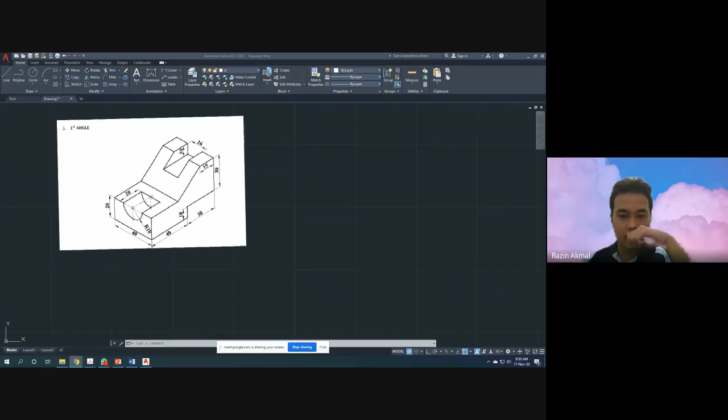Change the unit. Set the quadrant, correct? So first of all, we set the quadrant. You can set the quadrant by just adding a line anywhere, it's okay. Anywhere is fine as long as you have a quadrant or 4 quadrants.

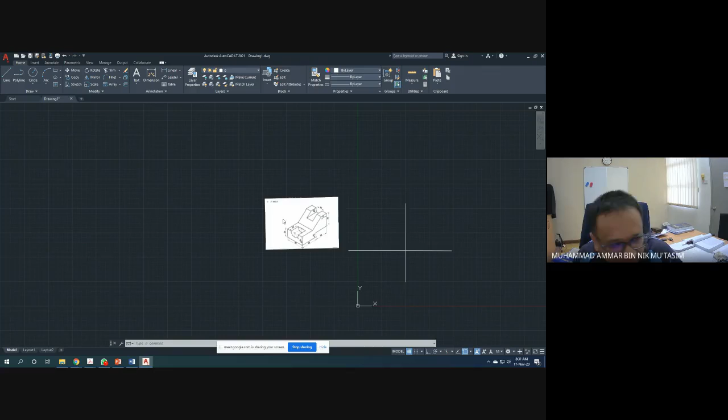Okay, and then what's next? Drawing a 45-degree angle on the third quadrant. All right, so this is the first angle. So we have to draw a 45-degree on the third quadrant, that's the main point. Okay, you guys can also do this, and this is also an assignment, so you should be submitting this as well.

First of all, specify the first point of the line. Okay, and then what's the 45-degree of it? What is a 45-degree on the bottom left? It's so if you cannot remember, you click on the units first, to make sure you change first. Okay, I didn't change because I was going to just show you without the units. But if you remember, east is 0, north is 90, west is 180, south is 270.

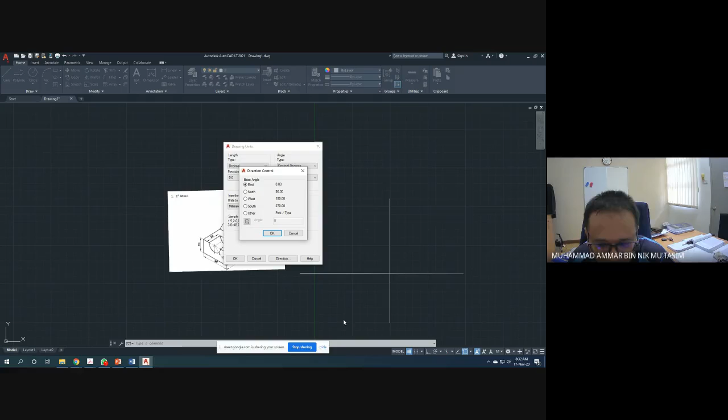So what's 45-degree on the third quadrant? It's 45 divided by 2, what is 22.5? So 180 plus 22.5 is 202.5. Okay? Correct or not? Okay, 202.5. So specify the line, set the direction, set the angle to 202.5. Tap enter. Is this correct?

You sure this is 45 degree? Doesn't look like 45 degree. So what is it? Calculate for me: 270, 225. Okay, good, it's 225. So third quadrant, angle 225. Alright, this is 45 degree. Okay good, so what's next?

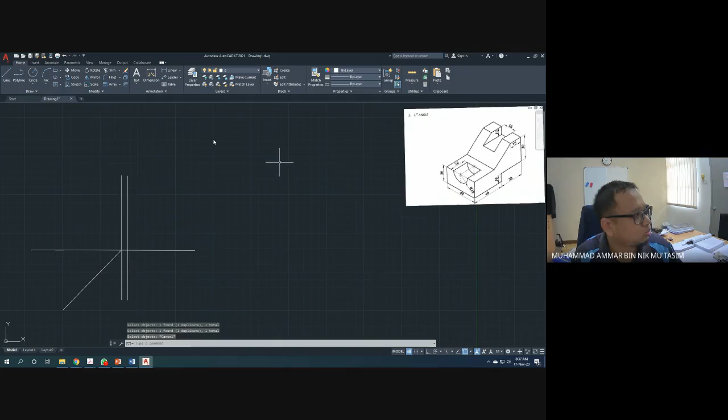You don't mind me, I'm just moving around because it's taking a lot of space. All right, okay.

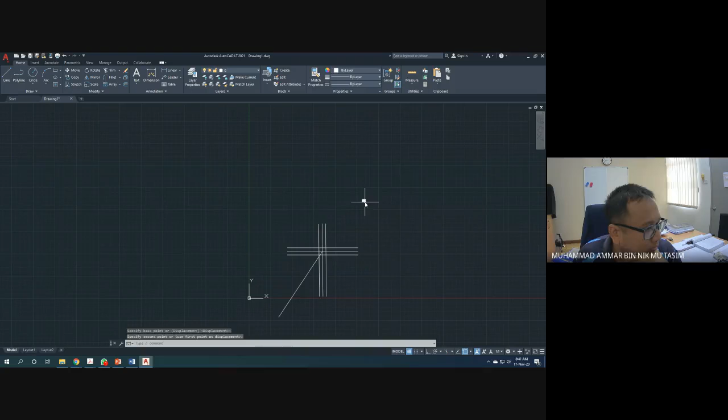Okay, has everyone managed to do it? So small. Okay, everybody done with the offset on the lines?

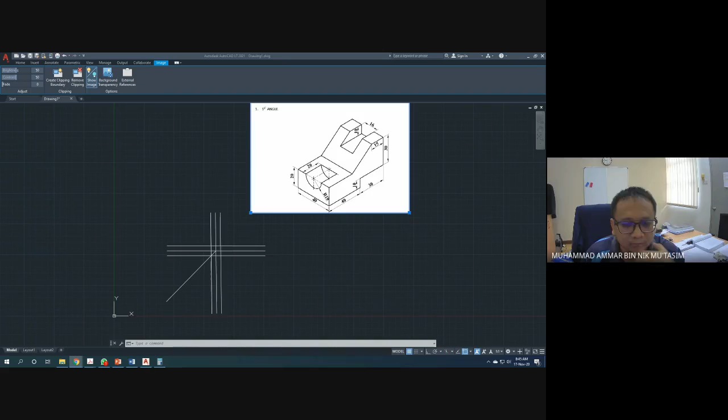Okay, all right. Is everybody okay? Right, so let's start with the drawing. Okay, let's start with the drawing.

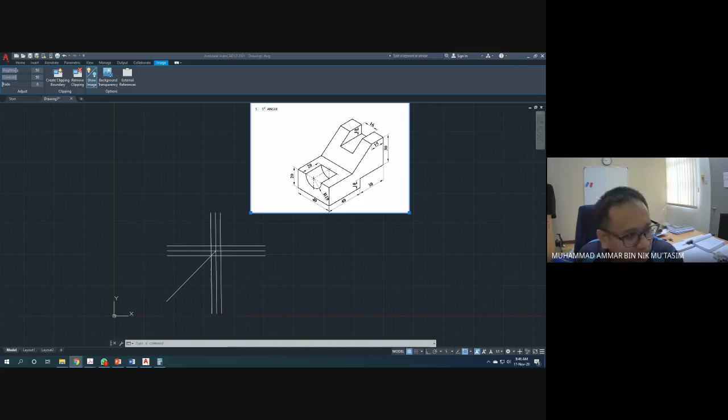So we are doing a first angle orthographic view, and then we want to know which direction the front view is going to be. So you can choose any direction you want, you can either choose this direction, or you can also use this direction. So the best way to choose a front view is to have the biggest surface area for the front view. So which one has the biggest surface area, this one or this one, for a front view? So this one, it has the biggest surface area.

So we choose this one as the front view, this one as the side view, and the top view would be this one. So to draw the front view, okay, you have 40 plus 30, 70. 70 plus 10, 10 plus 30 is 40. So it's 70, 40, that's the first one.

You should take the line, draw this one, 70, okay, with an angle of 0, of course. Okay, 70. Next, another 40, okay, with an angle of 90, of course, an angle of 90. So you have a 40 size.

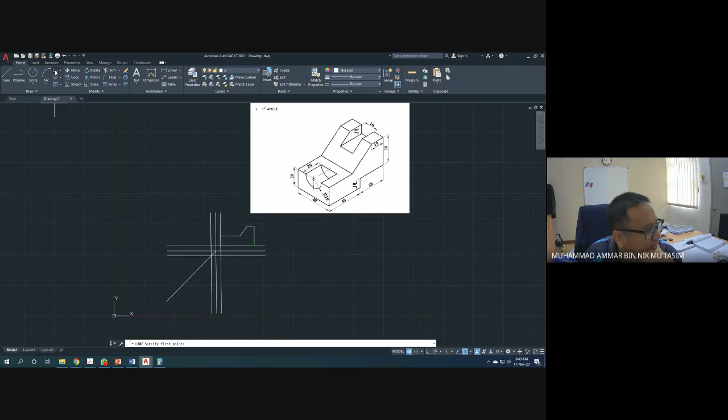Okay, and then you have to remove the bottom side. Okay, the bottom side is 30 mm. So you have to draw a rectangle of 30 mm. Okay, so and trim this one.

So that's the first front drawing. What else is missing? This hole here and the hole on top of here, correct?

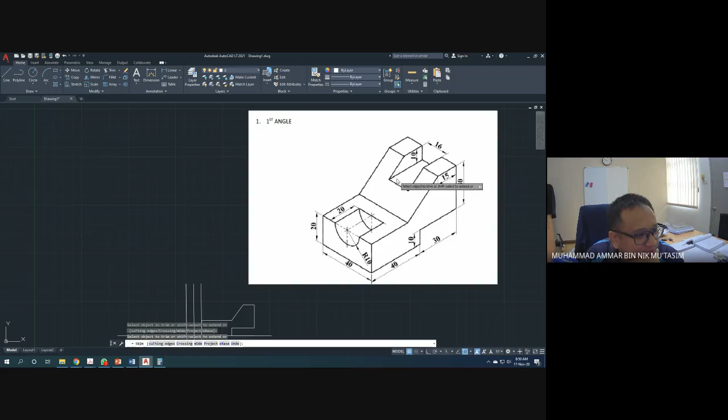So the hole here is about 10 mm, the distance is around... what is the distance? It's around 30 mm.

Okay, so you need to draw a 10 mm distance until, so you draw a line here with an angle of 270, and a line of 10 mm.

And then you draw straight 180, an angle of 180, and a straight line. But this one is basically the center line, of course, right? So this is the center line.

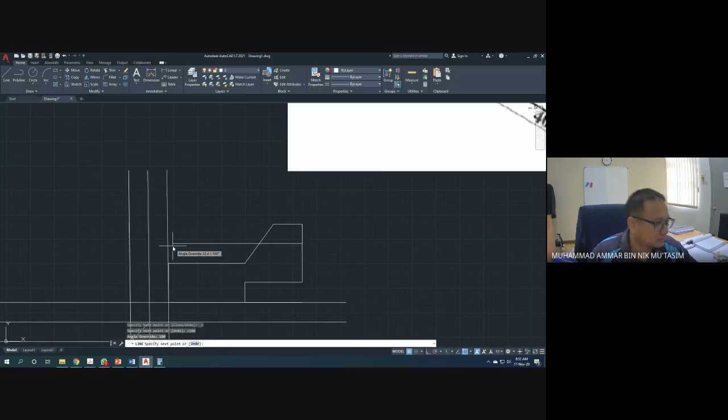Okay, another one at the bottom, you have another line which is a size of 20 mm. Okay, 20 mm with a width, radius of 10 mm. So a radius of 10 and a width of 20.

So choose this one, pick the distance of 20. Okay, 20, and the distance of...

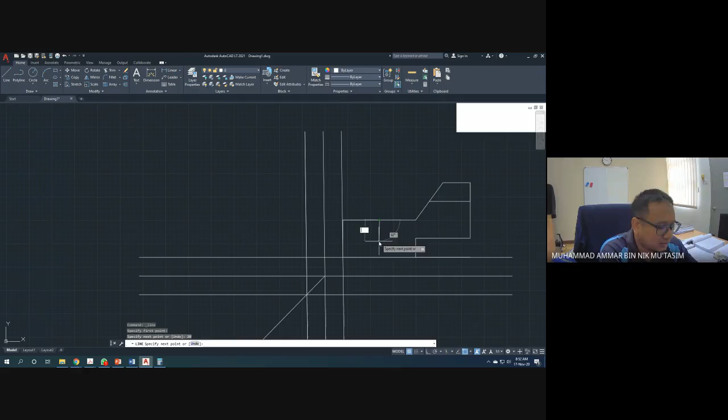Or better you just draw another line of 20 and direction of 90, and 10 mm, and a straight direction, another direction of 180 with a 20 mm distance. So this is another center line.

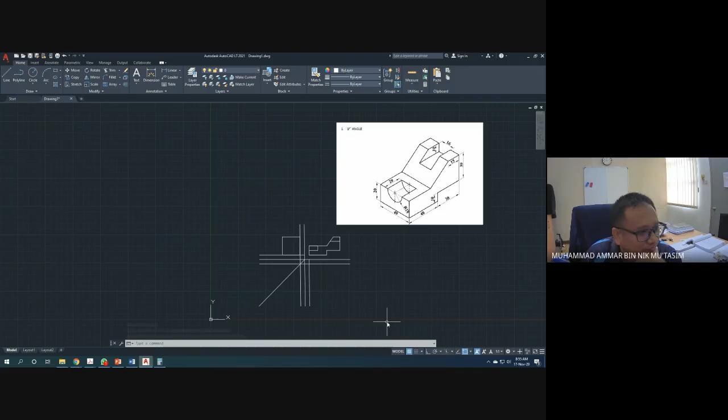Okay, so the first line should have a straight line of 20 from here. Or why is the line not centered? Okay.

I see. So this line is not straight, I believe. So that is fine. So we can just go ahead with this 40 by 40. Okay, we move the line.

So the first line is 20. So first is 20. Is a straight line. Okay.

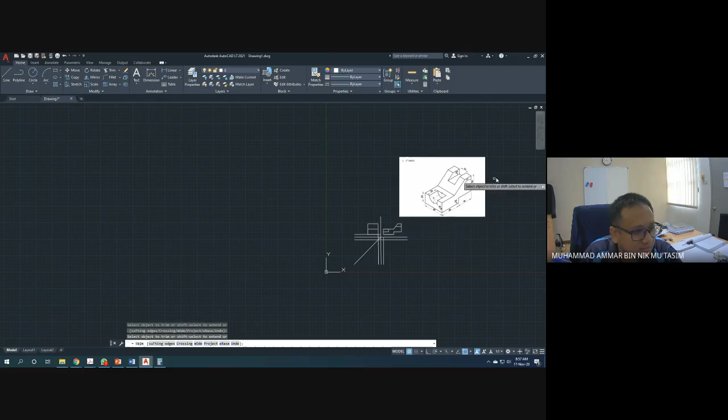Then you have 20, and then you have a semicircle. On top of that, you have another 30. So 10 from the top, which is a line, but with a 16. So 40 divided by 2 is 20.

So this is 2 and 2. Sorry, 4 and 4. Is it? If I'm not correct. Okay, 14, minus 40 minus 16 is 24. 24 divided by 2, 12. So 12 and 12.

So you have to draw a line of 12 and 12 here. 10 mm line, 12 and 12.

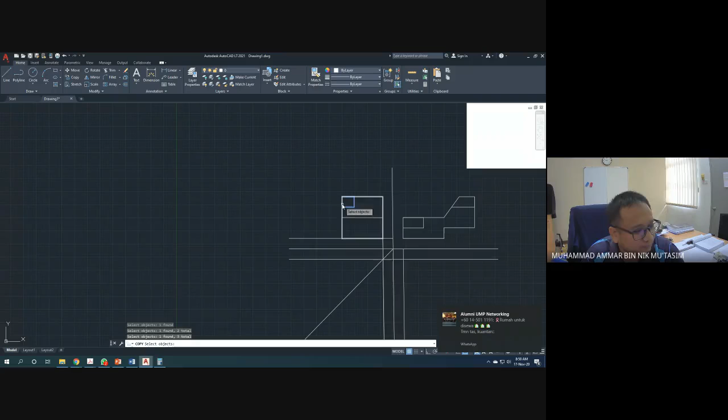You can trim this one. You can also copy this line. Okay, specify the base point. Another line, you can draw another line here to specify the length from here to here.

All right. So you can remove this center line here and then modify the line from here to here and trim the line of this one.

Okay, so that's, then don't forget about the semicircle at the bottom here. The radius of the semicircle is 10. So the side should be around between, so the 10, 20, so the side should be around 10.

In the straight line, you should draw a straight line from here until the bottom, and also another straight line from here. Okay, doesn't matter which side, and then draw a semicircle.

Okay, start, center or end, start, center or an angle. So if you don't have an angle, you can start and an angle. Start and end, angle of 180.

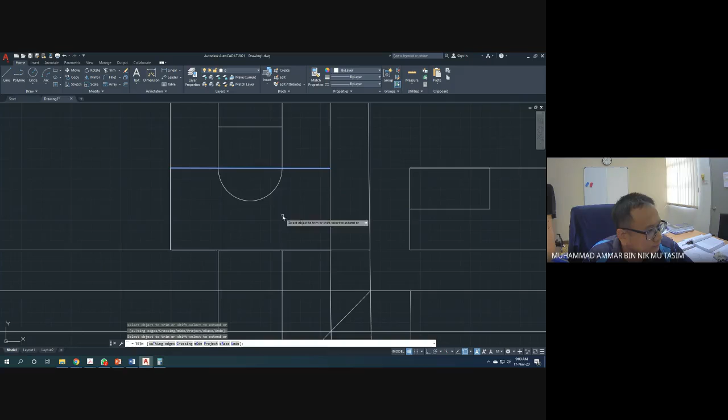Then you can trim it. This one, you don't need this. Mistakenly trim something that we need. So this one you can trim. Obviously, you don't need this one. You can leave this one behind for the next design.

Okay, hopefully the line here is similar, or no, doesn't reach. So there's still another line here. That's worrying. Okay, we need to specify the line again.

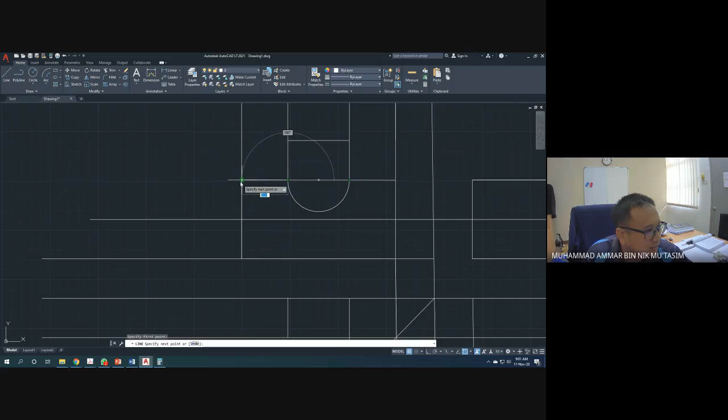It's 16 only. So that's a mistake here. It should be 20. So this one is 12. Should be 10 only. No wonder. All right. So fix again the line.

Line should be exactly 10 only for this line.

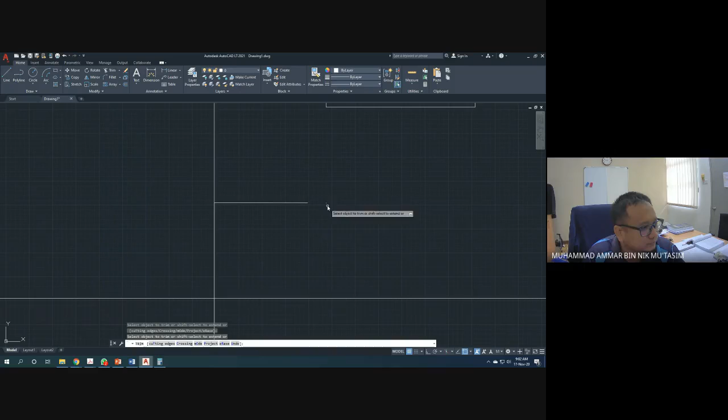Okay, then you need to trim this line. Then you need to copy this line, not move, copy, undo. Copy the line, so copy this line into this. Now you can draw the arc: start, end, and angle. Start, end, until you reach that point there, which is 180. Okay, so trim this line. You've taken this line as your trim.

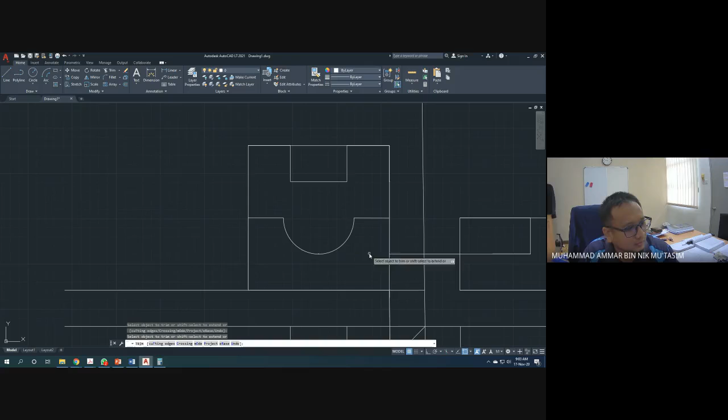Okay, what else is missing? We need to draw another straight line here. So another line or straight line needs to be drawn here. Okay, so that's done with your side view.

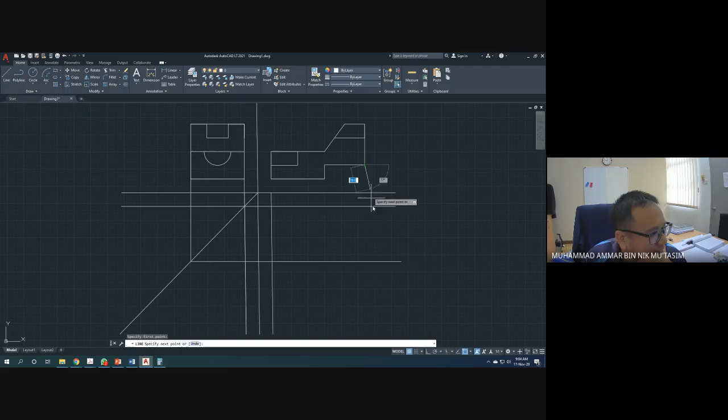Now, last point would be your top view. Okay, before we do the top view, just trim all the unnecessary line. So basically, you can also do this, draw the straight line, and see where the angle should be. So another line should be here, and we have this. You can also draw this, and you should know already where the top view is. So that is your top view. Okay, this is what your top view.

Then you can draw another line to specify where your angle is. So you can take this one. Okay, specify with a 90 degree. Sorry, 270 to 70 degree. Okay.

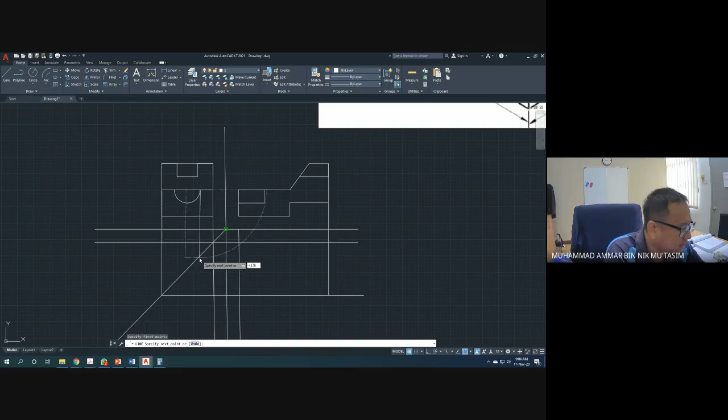Why is it doing like that? So one more line could be drawn from here to here. So you can actually draw all the required specific lines, until you don't have to calculate anymore because you already have the first line and the second line. Then you only need to draw the lines of this one. Since you have already everything together, just take the line, draw the center line, and specify where the distance is. Okay, one more is the circle, of course.

This one doesn't look very right, so we want it at zero angle. That's about right, it's about right. So trim all the unnecessary line.

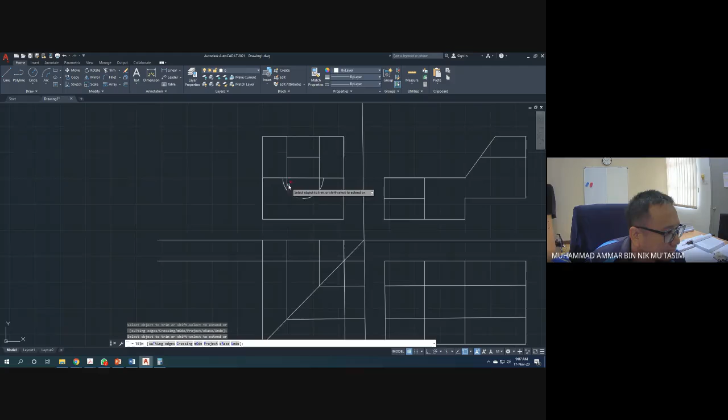Okay, until you have the line your interest is in. It's about right, that's about it. So this line is measured to be on this line. So basically you don't want this line, of course. You don't want this line. So basically you don't want this top front line. You want only the top line here. So that would be around, this is a 30 millimeter, this is a 40 millimeter, and this is a 16, and then there should be a line here, 30. So this one is not required.

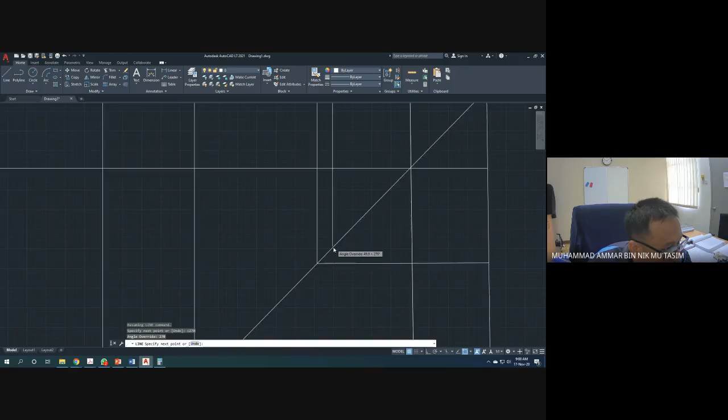Okay, and then you need one more line, which is this one here. So you can take the line here, draw it to the bottom. Okay, around angle of 270. Okay, and an angle of 0. So that's your first line. Then your second line is this one. You don't have to calculate anymore because you already have all the dimensions, so you don't need to calculate. Just need to specify the angle only.

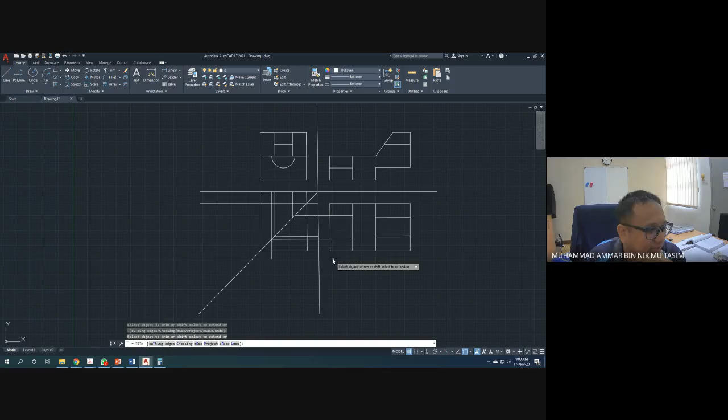So now you're done with the drawing. Then you can trim all the unnecessary lines, and you are complete. For the time being, you are complete, but not complete yet. Of course, you have to change the center line to a different line, the hidden lines. Change to hidden lines.

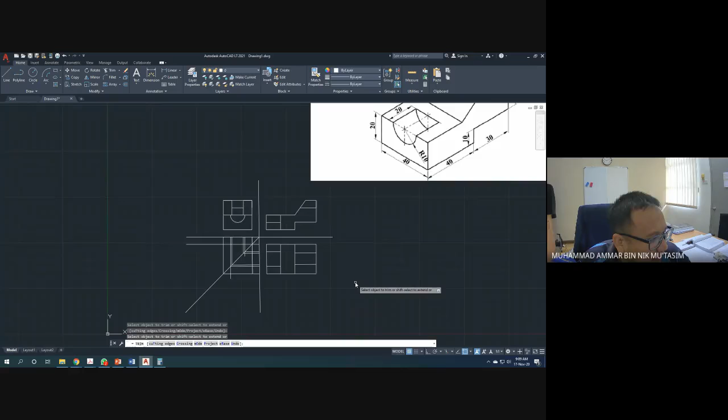Okay, everybody is quiet, eh. Is everybody okay with this drawing? Is everybody okay with the drawing?

So for the side view, right? Yep, got one dotted line, right, for the 10 millimeter. Yes, but at the moment you can change the dotted line by changing the layer properties. But I haven't actually explained that to you yet. For the time being, I will explain to you in the next class. Okay, how to change... okay sir, the lines.

At the moment, just use a straight line. Okay sir, okay.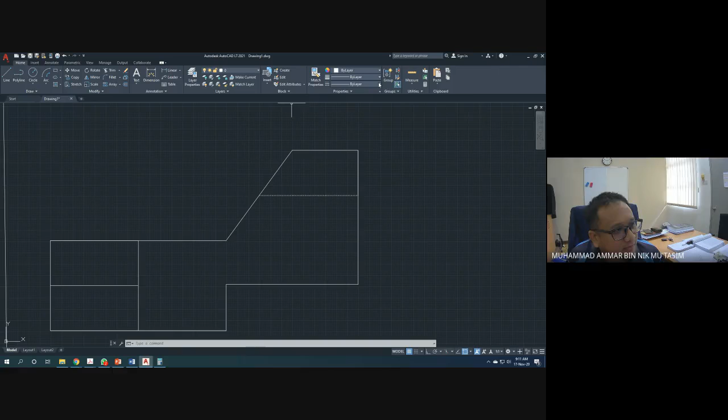Okay, thank you for asking us. We can also change the line by going to the properties. Where is this one? Layer properties. Layer and properties. Layers, block and properties. Then you go to the layers, go to others, change, and then go to load.

And find the lines, the hidden line, because we are drawing. Let me just cancel this first. If you look at the picture, this should be a hidden line, and this should be a hidden line as well. This one, this one, this one, and this one should be hidden lines. Where else is there a hidden line? From the top view, there is no hidden line. Okay, from the front view, sorry, from the side view, there is also no hidden lines. So only these two lines are hidden lines.

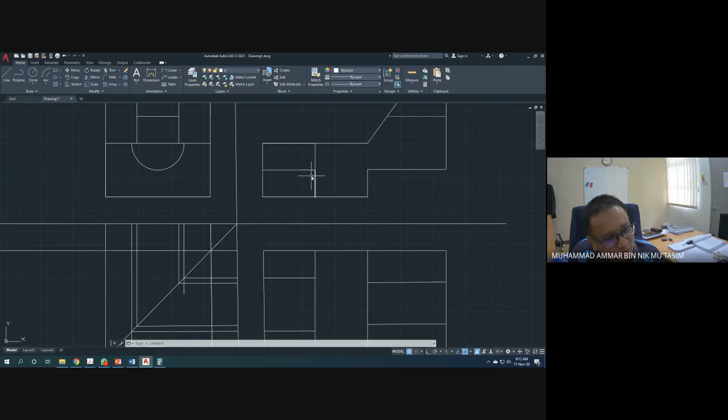So basically what you need to do is click on the lines that you want to make hidden. For example, this one. Go to the properties, sorry, go to the layers. Layers at the bottom of the layers. Go to others, load, and find hidden lines. Okay, hidden, for example, click OK.

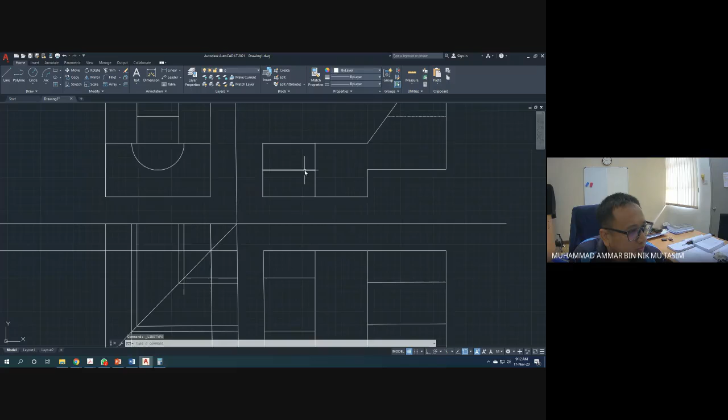Okay, and then I have done it. Click on hidden line, and you click on OK. Then the line will automatically change to a hidden line, like that. But actually, I'm going to explain to you about the layer first. This is also another way to draw a hidden line.

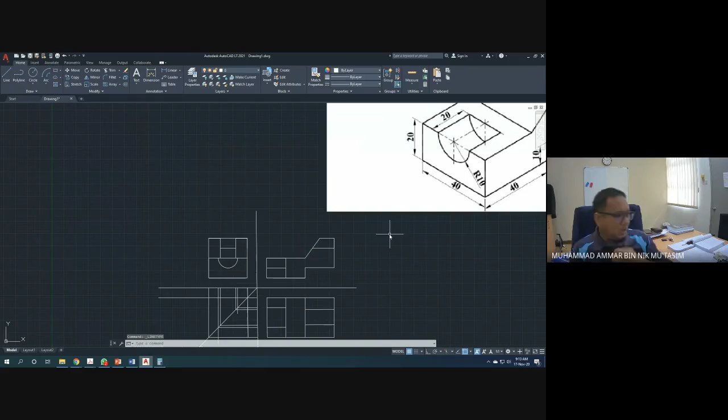And then you have a center line as well here. So you can go add another center line, load, add another center line. And obviously you can just choose the center here, click on OK, and it comes out the center. But make sure you have a center line first here.

So to draw a line, first you need to draw this line. Just like that, but you don't really need a center line for this one.

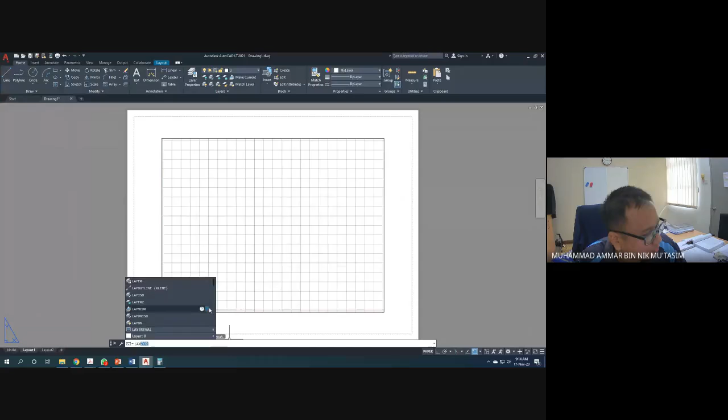So once you have done all of this, you can copy it. Now make sure before that you go to your layout, change the layout. So today we are going to do the title block. So you change the layout, you click on layout, LAYOUT, layout. Or you can also just go to layout here on the top.

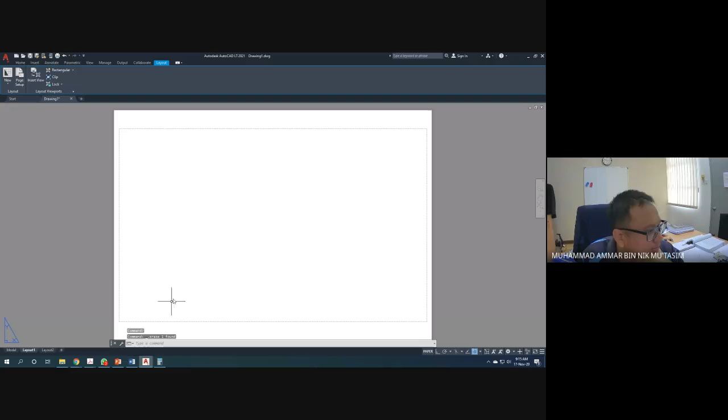Okay, this is your line. Click on OK and close. So this is your layout. You delete this unnecessary one. And then you draw a rectangle first for the boundary. Specify.

You can specify any point you like, or just specify 0,0. Sorry, 0,0, this is your line. Specify the top one. You can specify your line first, and then specify also the rectangle at the bottom for your title block. Okay, you can specify the height.

Another line, 7. Okay, 7, and then this dimension here is the one I gave you already in your technical drawing class previously, if you remember. And then you draw a division between the first line, second line.

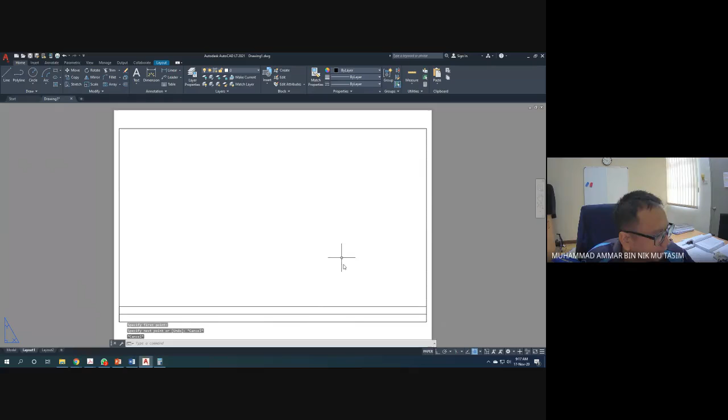You can write anything, okay, at the top. Now you want to put your layout model. So what you do is you copy this layout, then you can paste the layout to this one. Okay, delete the unnecessary line.

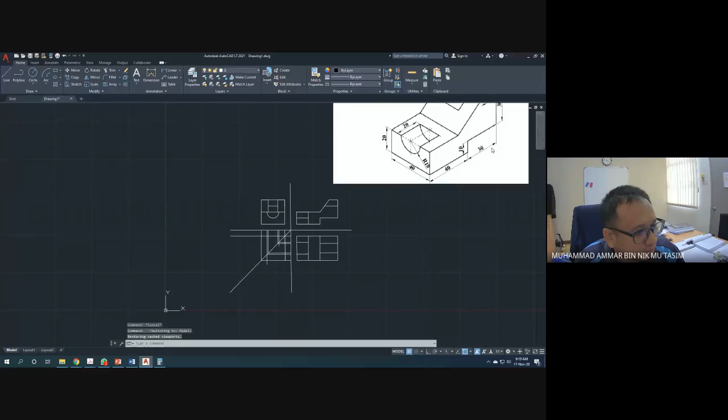Okay, and finally you have to include dimensions. So add the dimensions according to the drawing given. So the first dimension is 40, 70, and then all the dimensions that are required. But do not overstack, okay.

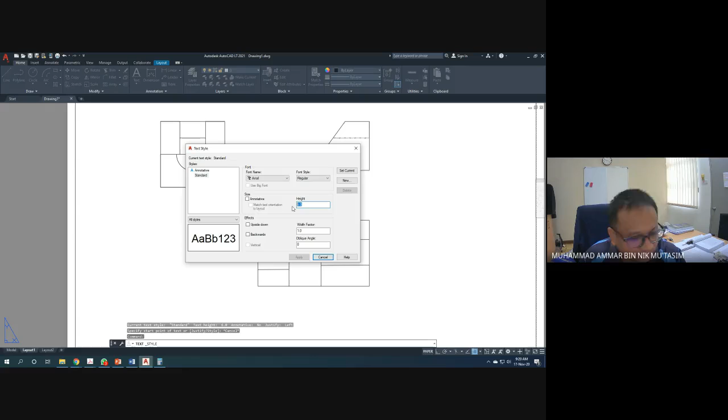Before you do that, make sure the height, you change the height to 6. Okay, hopefully it's the height that is the same height. Okay, 6 is too big, change to 5. Right, change to 5, 5 is enough, 5 is okay. Okay, apply.

And then also change the leader as well. The leader should also change to at least a size that you can see. Okay, the scale would be around 5 as well. All right, so when you write...

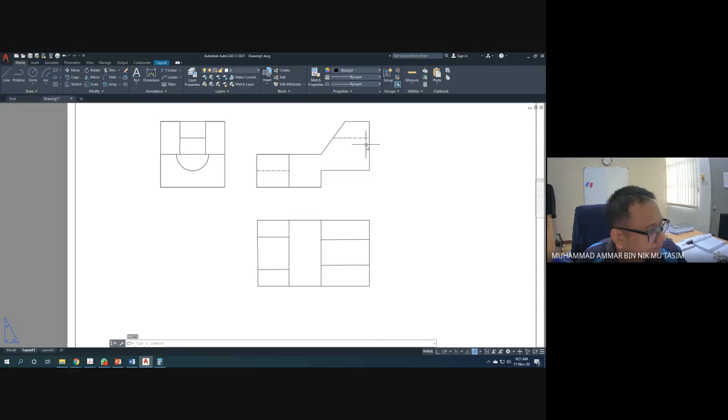Still, you need to change it here as well. Okay, you have to change this as well here. So still small, not sure why. Should have not... shouldn't have been this small. So just change this factor here.

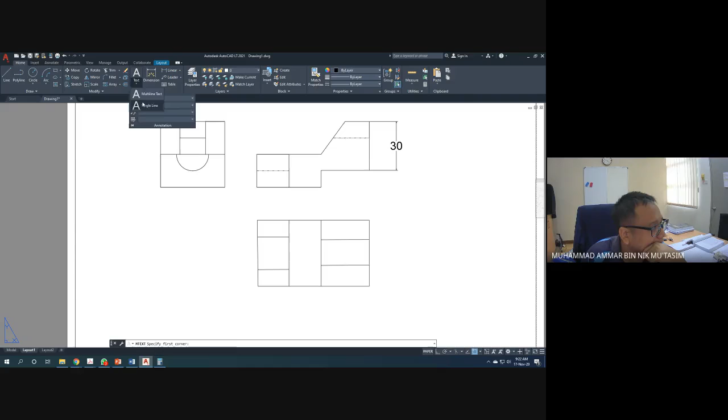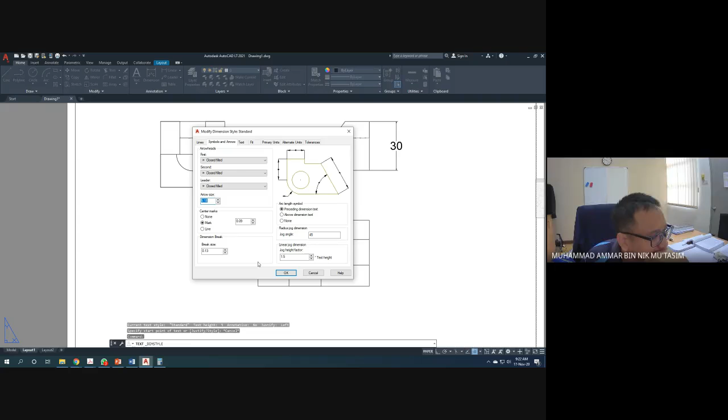Okay, change the scale factor to 5, measurement scale. The decimal, oh no, this one is 1. The symbols and arrow, change the arrow size to bigger, 5 is fine as well. All right, center marks, depends on what you do. I change to 3, 3 is fine as well.

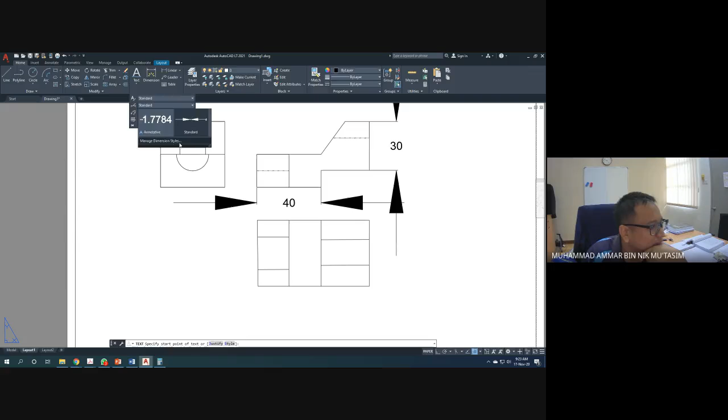The lines, change the lines as well. Modify the lines to something that you can see. Okay, oh too big, that's too big. Okay, this is too big for the dimension. Just this one should change as well. This is too big, so modify these arrows, let's say would be around 2. 2 is fine, okay. This one 2 is fine. 2 is also big, lah. One is possible.

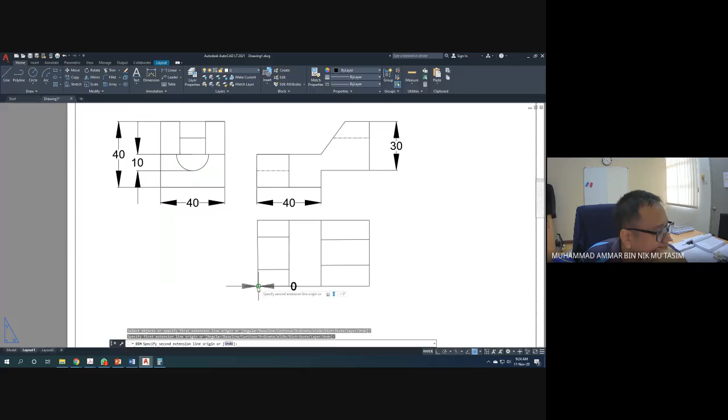Something wrong with my dimension. It should have been 70, but this one stated 40. So check for the dimension.

This one is probably wrong, and then you need to modify this one, of course. This one is correct. This one is also correct. So something wrong with the dimension, of course.

But change the leader. Don't use too big, okay, make sure it's just standard. Don't use 2, it's too large. Just change the arrow to 1. Okay, 1 is fine.

This needs to be fixed back. This one you need to fix.

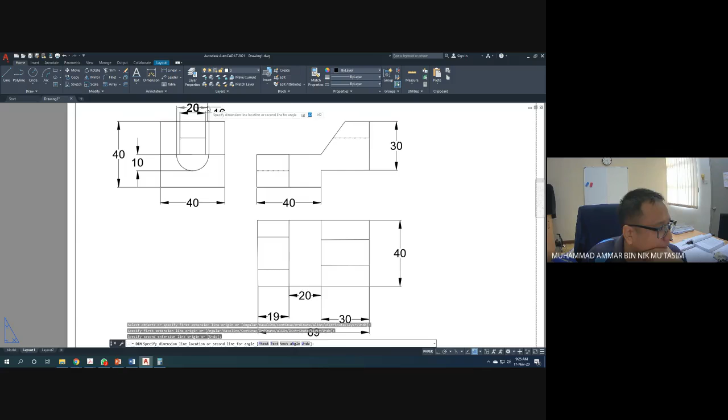Do not overstack the dimensions. Okay, do not overstack it.

Okay, so far this is your drawing, and then you need to write also your text. Okay, your text should be your name. Okay, what is my text? Something going wrong.

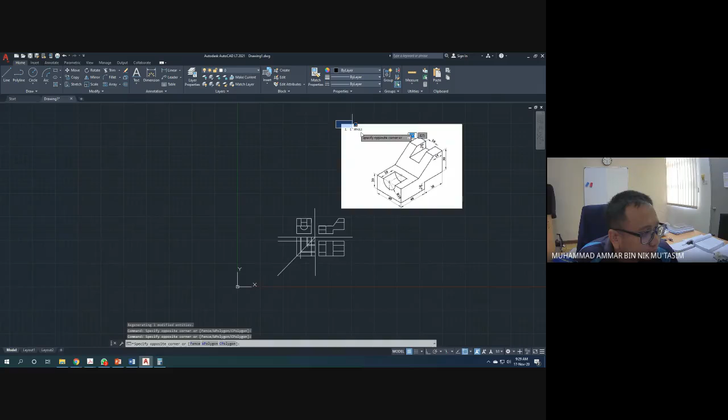Of course, this one you need to draw the figure as well. That will be explained later, but you don't need to draw it now. You just need to draw the first angle, third angle, and that only. And then this one, of course, you have to reduce the size.

Okay, so that's about it. That's the final output of our class today. Okay, is everybody okay with this?

Okay sir, all right, so save this. Save this in drawing 1. You can also change this to PDF. Okay.

Save in desktop and save anywhere you want, and make sure you print this also. Okay, if you want to print in PDF, you click on OK and then change to the desktop.

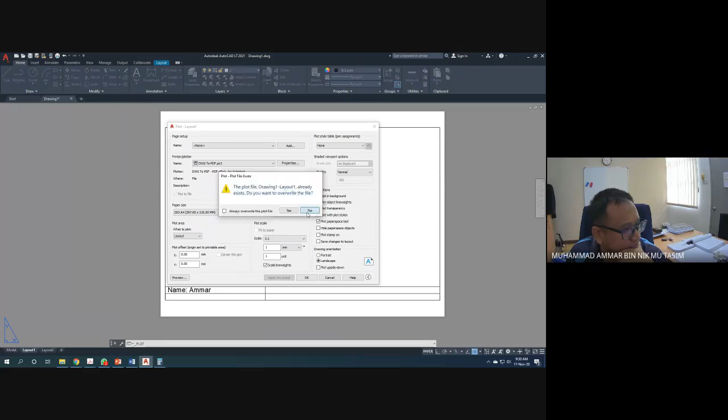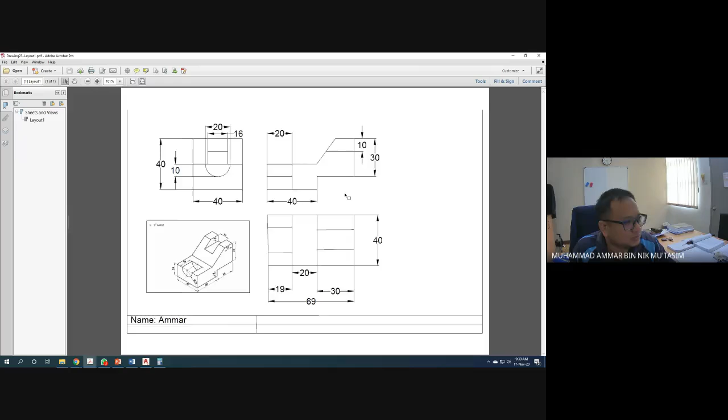Drawing 2, I think. Okay, that's your output, right? You cannot see it, however, it would be impossible to see the center line, but there is a center line here. You need to increase the font.

It's a center line, but it's big, it's very big, so you have to decrease the font. Decrease the font size. So to decrease the font size, click on this one.

Change the hidden line. Okay, change to another line which is smaller, for example 0.5. If it's 0.5, it's easier for you to see.

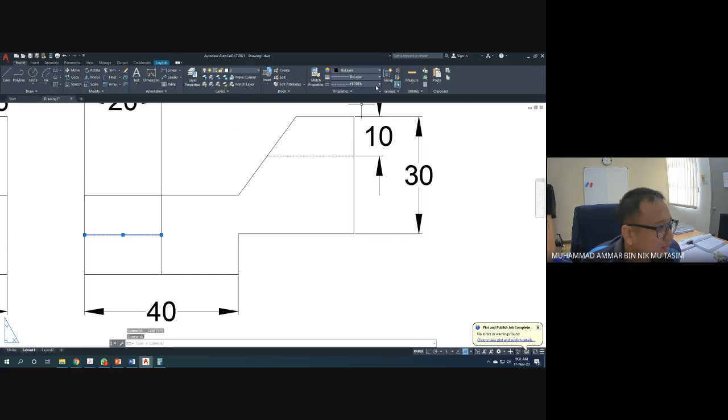Same for this one, change it to a hidden line. Hopefully when you print out, the hidden line can be seen, rather than just a straight line.

All right, so that's all for today. So make sure you do this assignment and do submit. Okay, do submit. I think I already stated the date of the submission.

This is for the first angle. All right. Any questions before we end this class?

Any questions? No questions? If there's no questions, we can stop the class today. So that's all for today's class. I hope everybody gets what we are doing today, which is the title block, and then the isometric to orthographic.

Later on, we will do Thursday, we will focus on the isometric and also the layers. Okay, right? Today we haven't focused on the isometric. Oh sorry, on Thursday we only focus on the layers. Next week we will focus on the isometric.

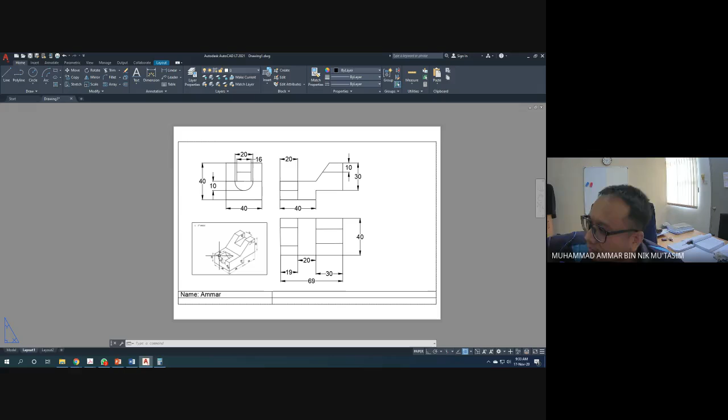Okay, and then also the hidden line next week. If it's, I think it's possible before your test. Your test is probably around week 7. So week 7 between 1st of December until 4th of December, 30th of November to the 4th of December.

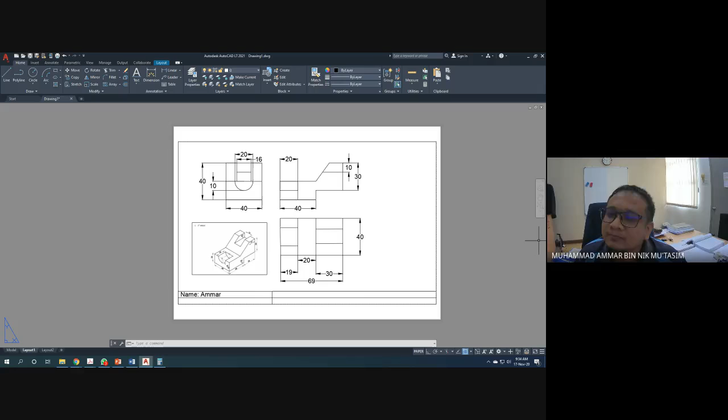Thank you. Thank you, sir. Thank you, sir. Thank you, sir. Okay. Thank you, sir.

Sir, for the title block, we need to write like this or like the previous one? The previous one, the previous one. Okay, thank you.

Thank you, sir, all right. Right, from the previous one. This is just an example. I didn't finish it up because, well, I don't want to finish it up. You need to complete this.